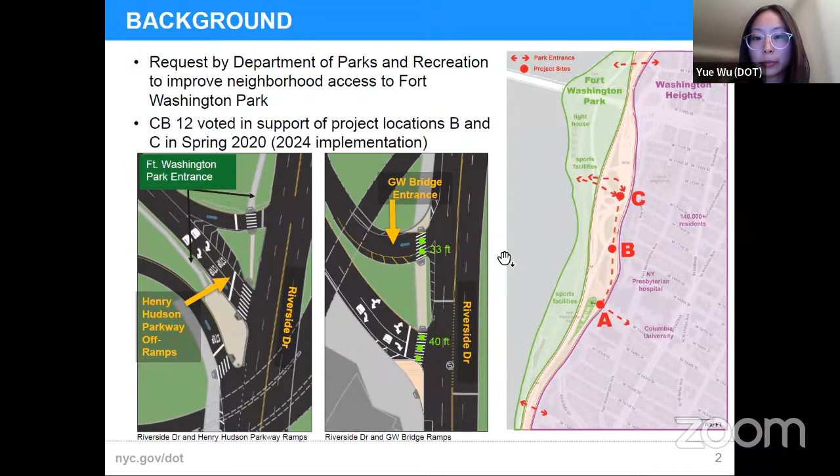Before going into details about the intersection, I'd like to quickly go over why we are working at this location. DOT got the request from the Department of Parks and Recreation to improve neighborhood access to Fort Washington Park, specifically at 165th Street and Riverside Drive - that's location A on the map to your right. We have also identified locations B and C for intervention because they are on the route to get to the park. B is at the George Washington Bridge ramps, and C is at the Henry Hudson Parkway ramps. We have already presented the proposal for locations B and C, and CB12 voted in support of our project in spring 2020. Today our focus is really location A, and we will go into that now.

I'm sure you are familiar with this intersection at 165th Street and Riverside Drive. To the west of the intersection is the entrance to the Dog Run, and at the northeast corner is New York Presbyterian Hospital, Columbia University Medical Center. Both are destinations that generate pedestrian traffic. In late 2018, the signal timing was adjusted at this intersection - the westbound to northbound right turn on 165th Street was changed to no turn on red.

Aside from connectivity and accessibility issues, safety is another important issue we need to address here. In total, there were 69 injuries at this intersection between 2016 and 2020, including 13 pedestrian injuries, one of which was severe. Six of the pedestrian injuries occurred while pedestrians were crossing with the correct signal. We have also observed pedestrians crossing without a crosswalk regularly, because there's only one crosswalk at this intersection. This really creates an unsafe condition here.

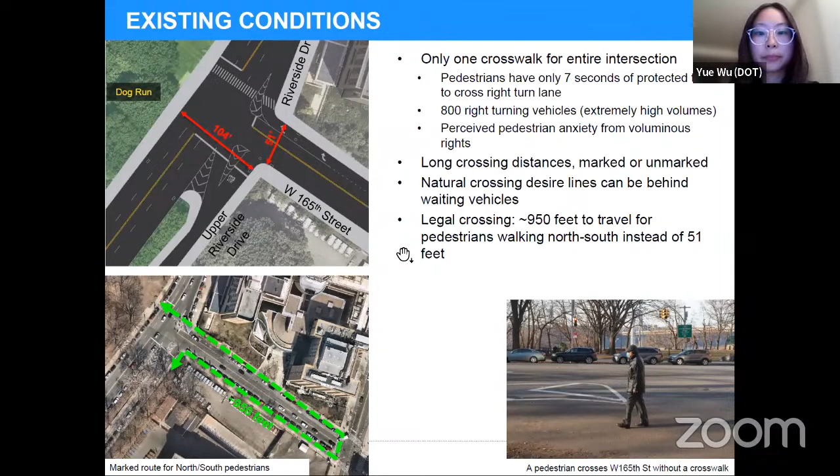Now, let's look at the proposed plan. First, I'd like us to keep in mind that the improvements we are presenting today will be implemented in-house with DOT's in-house resources. That means the tools available to us are relatively low budget compared to the big capital projects, but we are able to use these tools efficiently to address the issues we identified before.

So this is our proposed plan. I will go over the interventions one by one. Number one, we are installing 2 new crosswalks, north-south and east-west. And we are installing graveled or painted pedestrian space, represented in the cream color here, at the northeast corner and southeast corner. This pedestrian space provides more queuing space for pedestrians and also helps to shorten the crossing distance.

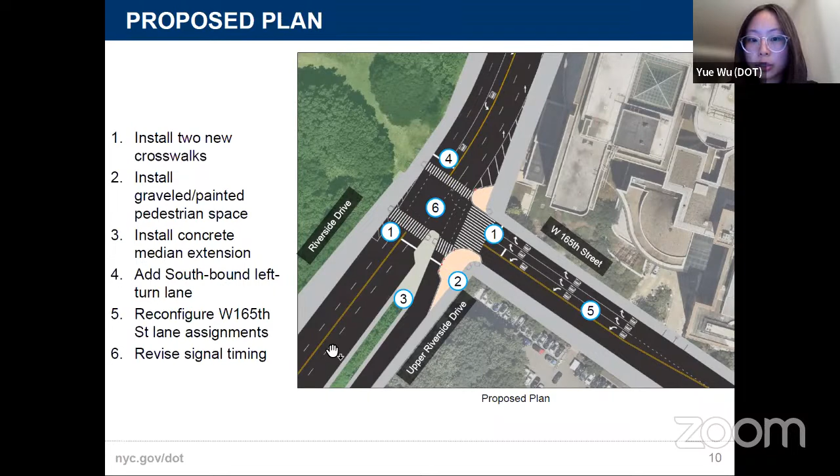Number 6, we are revising the signal timing, which I will show in detail in a later slide. With the proposed condition, we are creating safe conditions for pedestrian crossing. We have shortened the crossing distance: the north-south will be 45 feet and the east-west will be 66 feet. The stop bars are relocated to meet standard intersection design.

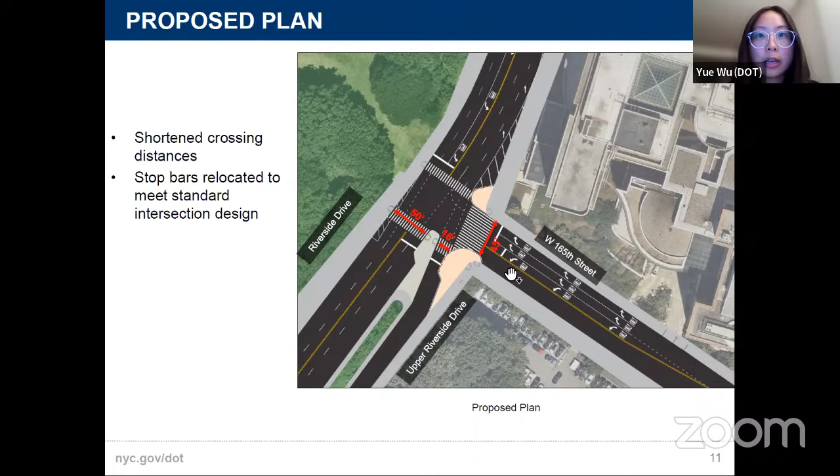The next slide is about the changes we need to make to the curbside space. In order to clarify vehicle movement, we are proposing to convert 17 short-term parking spaces on Riverside Drive to a full-time moving lane, to accommodate the left turn lane I mentioned before and reduce the delay on Riverside Drive southbound.

And we are converting 11 long-term parking spaces to a new merge lane from Upper Riverside Drive, since traffic coming from Upper Riverside Drive and Riverside Drive needs a merge lane to merge going north. Then we are converting 9 parking spaces to a second full-time right turn lane on 165th Street, again to accommodate the high volume of right turning traffic.

And we are adding 2 parking spaces next to the new concrete median extension on Riverside Drive. So overall, we are reallocating 35 parking spaces to travel lanes, with the goal to create safer and better traffic operation.

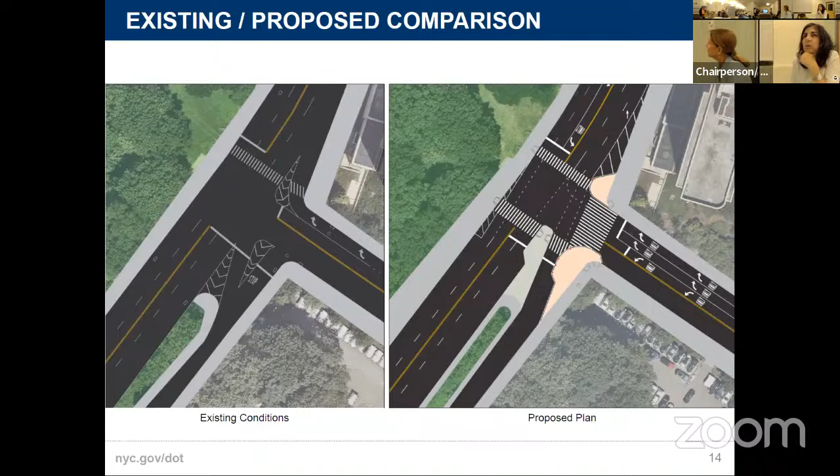I guess before I pass it to my colleagues, I'm just curious, am I just not remembering right? How were you thinking about the southbound issue? Can you tell us a little bit more about what you observe and what happens on southbound Riverside Drive?

Right, the southbound, that was part of what we discussed in the spring. The southbound left turn bay is actually a requirement from our signals unit. They said that during the morning rush hour, the high volume of left turns, which I think is around 400, is incredibly high for a left turn. They said that if we're going to work at a location, we have to bring it to current standards. So that's what they said when we presented various timing and design options to them. That was a few years ago.

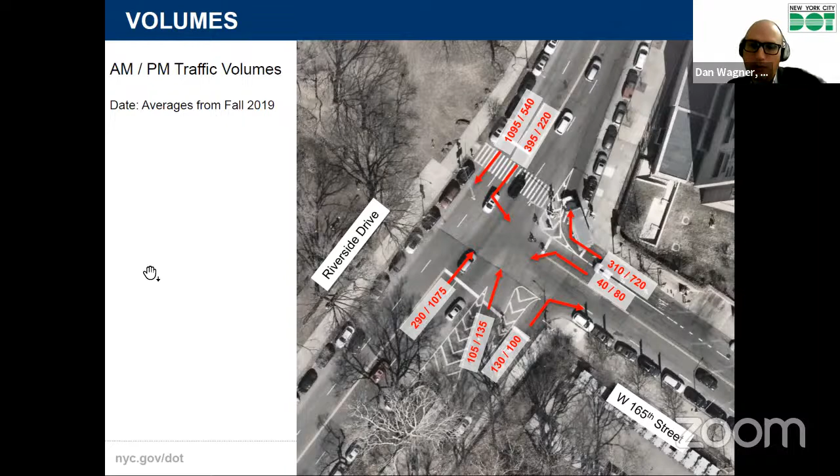The idea is essentially that if you're driving south, coming off the bridge, heading to work in the morning, and you're in the left lane but don't need to turn left, you're invariably going to get stuck because those volumes are so high. That means there's people trying to turn left there, creating a delay for the southbound traffic, almost 1,100 vehicles going south. They want to get people into their correct lanes, because that's way too many vehicles for one lane to handle. So they said you need two through lanes and a left turn bay if you're going to work here. That's what the proposal incorporates.

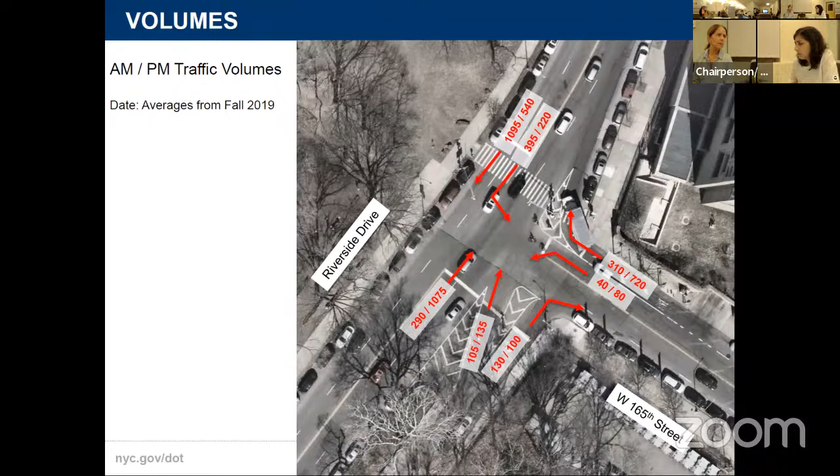Thank you for this presentation. I'm completely thrilled with every aspect of it except for one, and that's the parking. The reality of this area is it's heavily traveled by all kinds of people, and many of them, including residents at night, actually use the public parking on the street.

Now, there is a garage provided by the hospital available, but it's probably expensive. And the reality, you probably hear this all the time, but these parking spaces—because this area is so important for the health of the entire city, since it's such a major medical center—I think the number was 37 or something like that. These 37 parking spaces, if not here, then somewhere else should be made available. Now, again, I realize DOT doesn't have a magic wand and can't just make parking spaces available. And the other reality, of course, is if the traffic isn't moving in a smooth and proper manner, this has all sorts of negative ramifications.

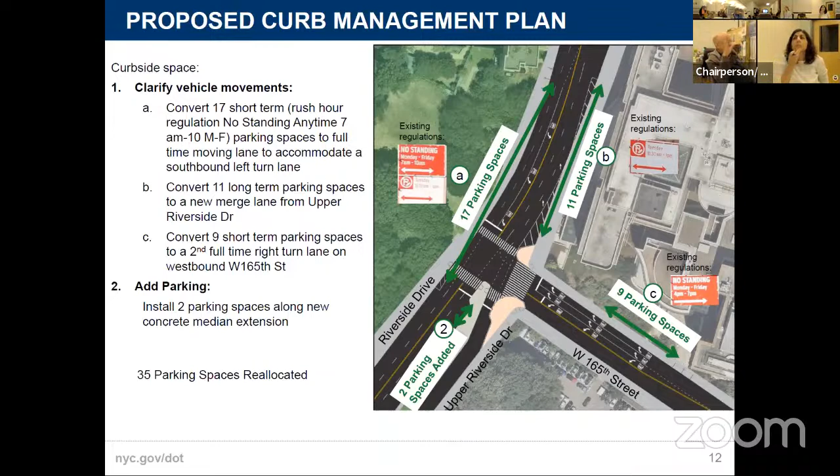Well, could you go over again the left turn aspect of this? Let me preface it by saying it's my ignorant understanding that left turns are inherently dangerous. For instance, there are no left turns in the whole state of Michigan, and traffic seems to flow there - of course it's a lot less traffic than in New York City. So for my benefit, at least, maybe some other people too, could you go over the left turn aspect of that in terms of safety?

Sure, you're talking about the southbound left turn onto 165th, yeah. It's essentially agreed that a left turn is more dangerous than a right turn. That's because when you're turning left, you have to cross the oncoming traffic, and then you also have to cross the pedestrian crosswalk. So a lot of times somebody turning left will try and find a gap in the traffic, which is somewhat dangerous on its own. And then, because they were so frustrated with the high volumes of traffic in New York City, they may have forgotten to account for the pedestrians, who are in fact more vulnerable than an oncoming car, and who are crossing slowly through the crosswalk. That's why the left turn is more dangerous than the right turn.

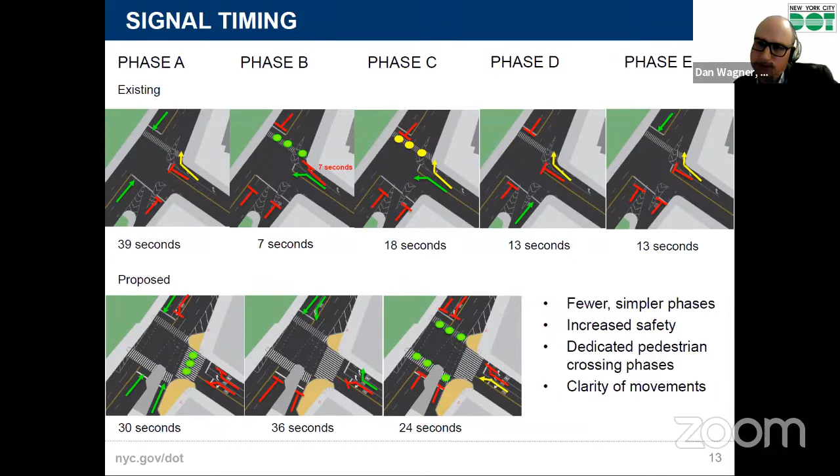But it would be a wonderful solution. You're right. Jody.

So this is my opinion, and I've been working with the residents of this area for a long time, and also Julio Batista on this issue. And I know it's a problem as far as parking, but I have to tell you that intersection is very dangerous for pedestrians. There is only one crosswalk, and we've just had a brand new sidewalk installed. And if you get to the end of that sidewalk at that intersection, there is just no way that you can cross that intersection safely.

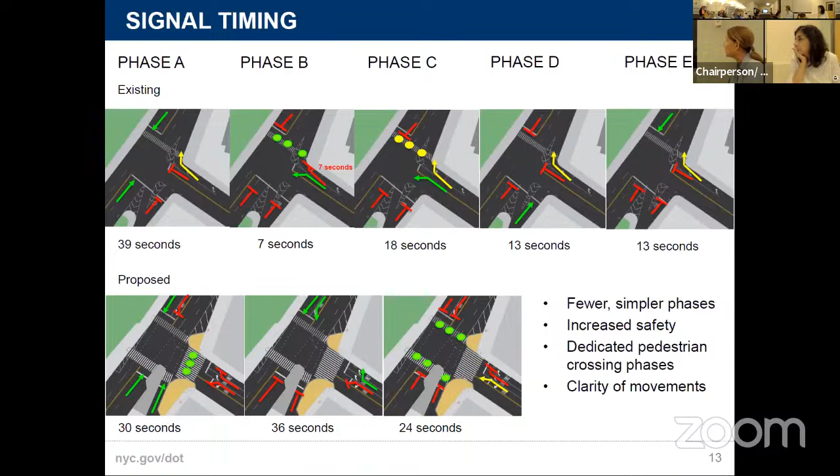And I really do believe that we need these crosswalks. And I believe that what you've set up as far as a design here is beautiful, and it's going to make it a lot safer for everybody, to include car traffic movement, and to allow pedestrians to cross. And I personally am willing to forfeit some parking spaces for that to happen, my opinion. And I think to a large degree, the residents of this area wanted to. That's what I'm hearing.

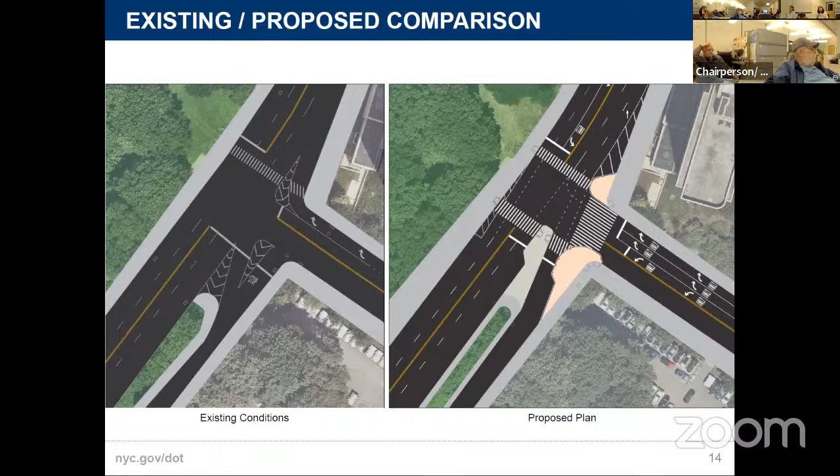People will follow the rules provided we don't get ridiculous, and so at the very least we need to alert them. I don't know exactly where you get onto that spur or whatever it is. As you all know, probably everyone in this room, we have 3 different Riverside Drives, just to make matters confusing. Especially for people new to the neighborhood, because what many people want to do is precisely make that right turn, since that's where they're going to turn to get to the hospital. So we have to facilitate that for them with additional signing. Thank you.

That's a good point, and it's hard to see how you're loading on that much volume onto the little... whatever we call it. This project will definitely come with the appropriate signage and diversion plan for that right turn. But the most immediate right turn option is actually at 161st, which will bring traffic back down to the intersection of 158th and Riverside. Frankly, if I was a driver doing that, I would probably end up on Broadway, just going north on Broadway, a couple of lefts.

Maria Luna has patiently been waiting. Maria, do you want to go ahead? Just unmute, Maria. It ain't working. Can you try again to unmute? No, you got it, there you go.

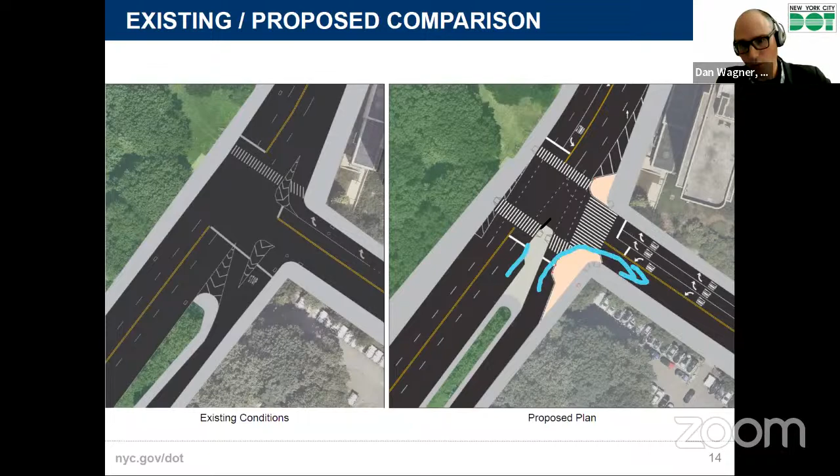Let me stop you right there. The upper Riverside Drive comes from 158th Street on the upper drive. The people who are coming from lower, from the middle, come from downtown, from around the other area - the mid Riverside Drive and the Riverside Drive West. So we cannot say that people have a choice of turning here. I'm talking about the people around here - where are they going to come? Are the people around here... you see my little arrow, the blue thing that you have here?

You have one going up north, on 165th. The second arrow here, where are they going to be turning? So the ones coming from... the diversion plan includes 161st as you're driving north, like the previous intersection.

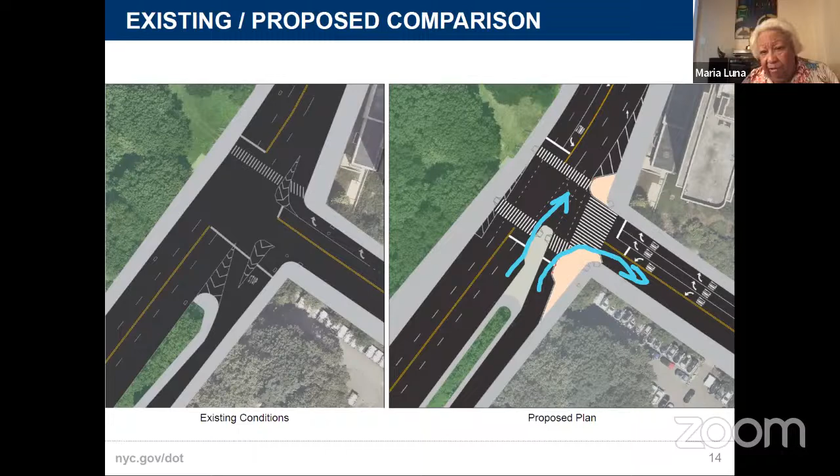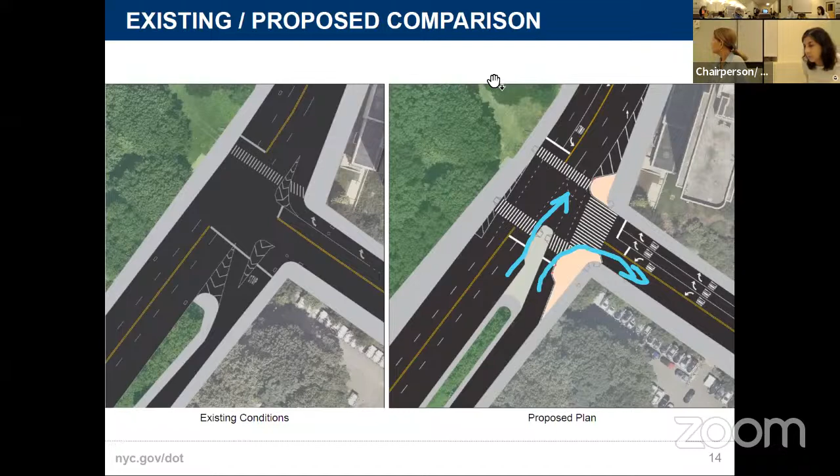We have 161st around here. Maria, sorry, I don't want the back and forth. Dan, is there anything you can show us? Because I'm having a hard time visualizing where people are entering at 161, it's a little hard to wrap our heads around. I don't have anything prepared, but I can share my screen that shows a map.

If I could say, that's 158th Street, that's where they would be able to come from. So here's what we'll do. Here's 165th, this is the intersection we're talking about, right? On Riverside Drive main line, there are no previous intersections until, going south, until the one at 161st.

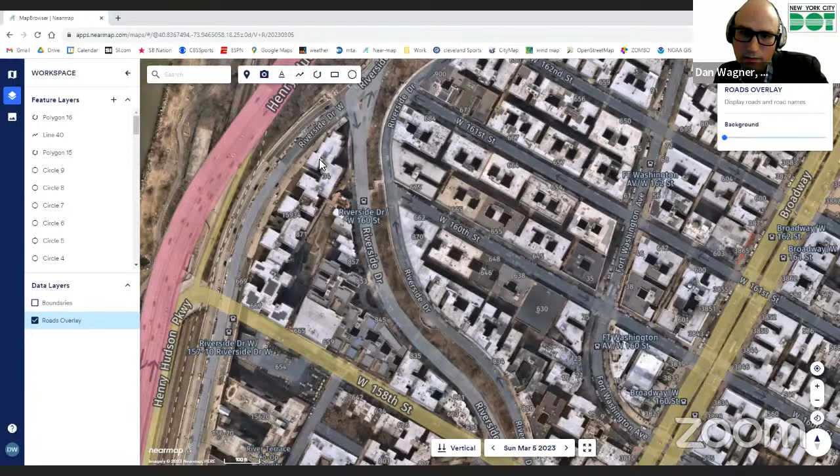There's Riverside Drive West, there's Riverside Drive, there's too many Riversides. But at this intersection, it brings you back down to 158th. But 158th is also south of here, so that's just as confusing. But at this intersection, whatever we want to call it, is the previous right turn option. So somebody in this neighborhood, if they wanted to go to the hospital, you turn right on this Riverside Drive, and it will take you to 158th Street.

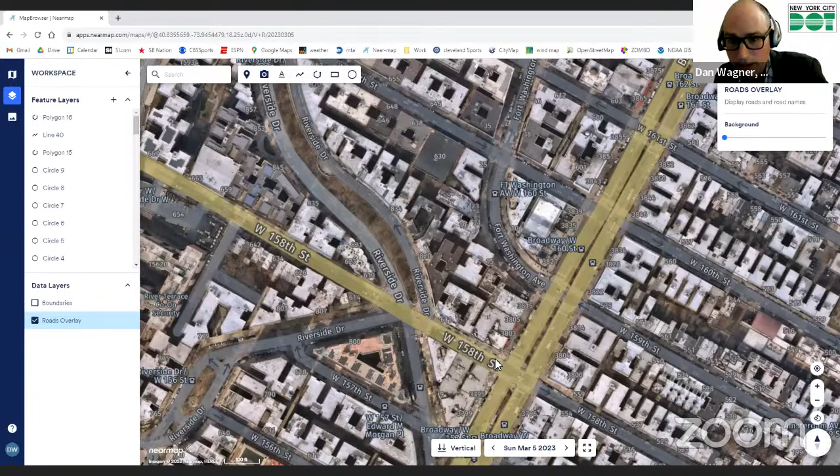And from there, you can either do a U-turn onto Upper Riverside Drive, or frankly, if it was me, I'd probably just go down 158th and turn left on Broadway. Sorry, that is a two-way street. That's where I live, right there where you have the arrow. Yes, okay, so I know that area real well.

So there is no way people can come from downtown, turn around there at 164th, go around the curve of where I live, go to 158th and go around on the Upper Drive. No good, there's no way you can do that. I totally agree with you. Somebody coming from downtown wouldn't do that either, they would turn right at 155th and come up this way.

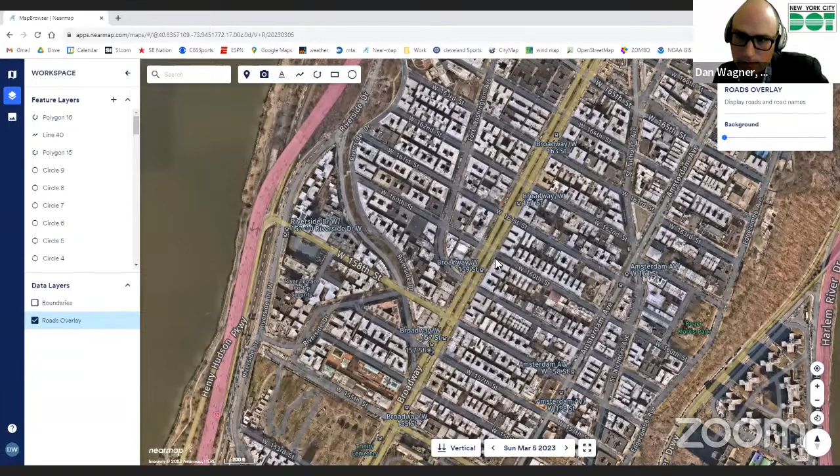Yeah, but I thought you were asking about local community. No, forget about Broadway, we're talking about Riverside, going north. Maria, I can't— I live here and I know what I'm talking about. I need protection for this area. We're not having a back and forth, I'm just pointing out that on the map, at 164th near the little playground, you continue going up to 165th Street.

That's the area that I'm concerned about. Okay, right, I got it then. So, we asked and answered: at 165th, where are we turning to go to the hospital or wherever it is? That needs to be clarified—the upper drive and the middle drive, right?

Julio? And then Bruce, and then Radia. Thank you. I sort of visualize and understand what DOT is saying, but unfortunately drivers are not going to go north, then head back south, and then go to Broadway. The last thing I want to see is people take the upper drive so they can then turn on 165th Street to make that right turn. It puts that little Upper Riverside Drive in a congested state, there's a lot of people there, and it's creating a worse situation in terms of safety.

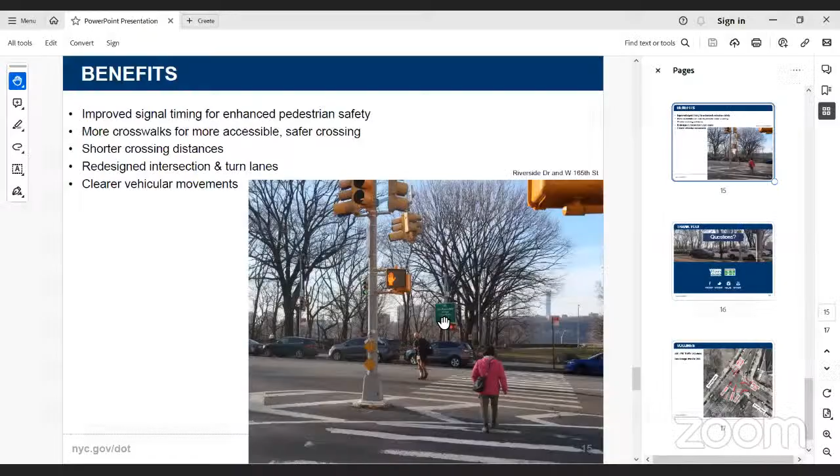Now, I would like to ask about the map—I assume there's no concrete work, this is all painting that's done. Instead of creating this long island on 165th Street, is there any possibility that instead of having that straightforward island, it could be redesigned so people who want to make that left turn on 165th Street will be able to do so before they get to the corner? You won't have a continuous island, but you'll still have a median in between so that if you need to cross the street, you still have the median in the center to cross over to the west side of 165th Street.

So I'm not sure if you understand what I mean. I understand, we explored that. Again, I didn't want to create challenges for the community, I wanted to create better pedestrian crossing here. We explored that, but it didn't work with the angles in which vehicles are required to maneuver to make that movement. So the best we could do is to ban it.

It's sort of feeling like that even more than the parking, that's not a way to go. That's like a circuitous detour. And we're not going to send people into that 5-way, 6-way Edward Morgan intersection and tell them to finagle that, because that's already a hot mess.

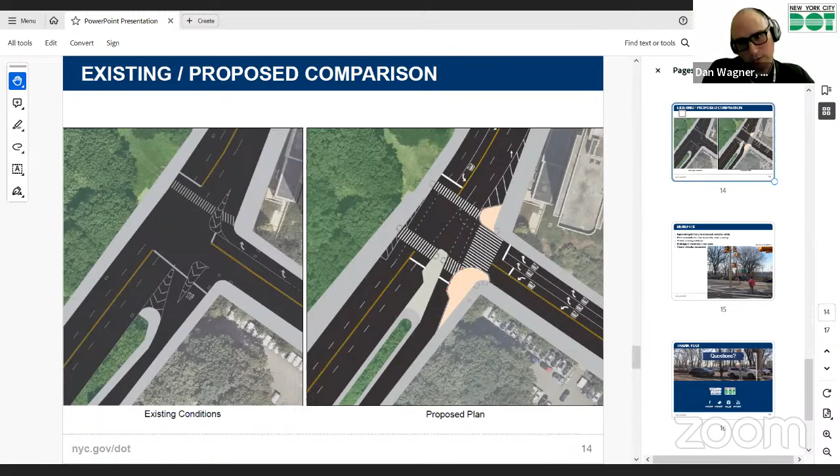Good night. Lyle, I'm gonna just ask you to go right into updating the committee, and we have people in the room as well as online that are very interested to hear about the safety improvements at Margaret Corbin Circle, which for the past, I guess, 2 years at least, has been at times a very, very tough drag racing spot.

Yeah, I'll try to do this quickly. I don't have any visual aids with me, unfortunately, so I'll talk through quickly, ideally, what the plan for the circle is. But yes, DOT does have some pedestrian and traffic safety upgrades that will be coming to the circle in the near future.

As Debbie mentioned, she and I spoke last week. I reached out to her to let her know, and she asked me to speak to the committee to say a few words about what's to come. So, just as a brief overview, we've heard from elected officials and others in the neighborhood who have asked DOT to look at installing new safety measures inside the circle to try to mitigate the speeding and other reckless driver activity that takes place there.

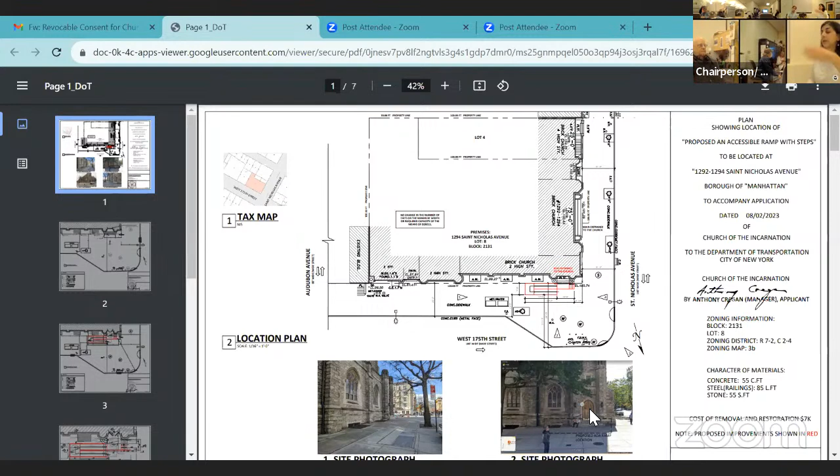Yeah, hold on, plus sign up. I know, it's just that then at a certain point, so I guess I would encourage members of the committee, if you want to go up and sort of look at the layout, and Jim, maybe if you can just point and narrate, and then I will. I'm still trying to find the ramp.

Oh, it's in red. Hi, Leo Jimenez. I'm sorry, it's in red, so this would be the ramp. Hey Debbie, hi Cody, how you doing? Doing well. There's nothing up here at the main entrance. Well, they said it's in red, so it's this thing, apparently you go.

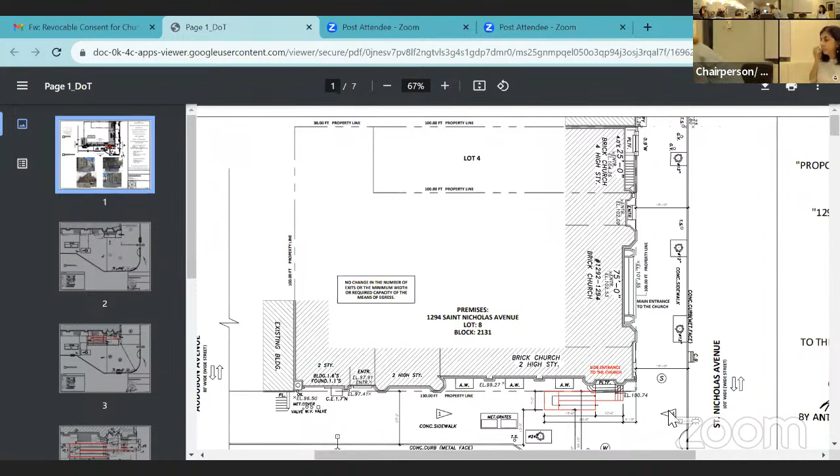So we're around going like to this side, and we're going to the side, right? So the issue is how wide the side street is. And that side is very wide also. The side street is wide. Right, the sidewalk that's on the side street, which is 175th Street, that's wide. Okay, so I mean that could be a problem, and they're not.

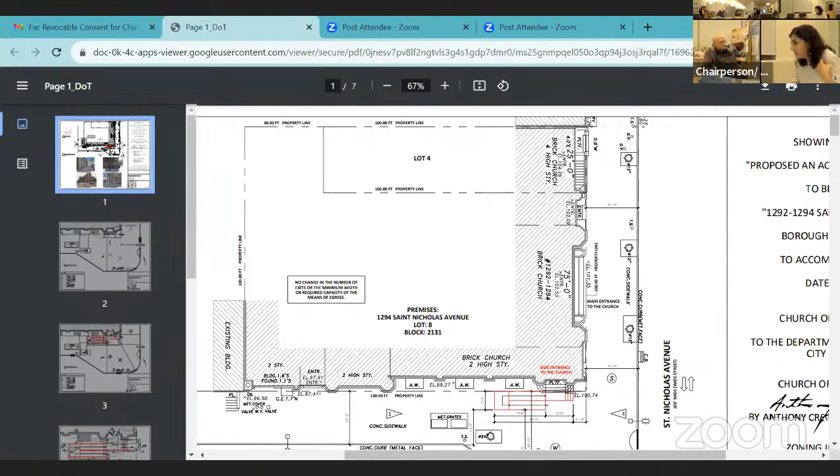Just for people that might have a hard time hearing, we're just trying to confirm that there is appropriate sidewalk remaining to move around, which I think has to meet the specifications of ADA on the sidewalk passing. So I'm not really worried about it because it's, let me see this photograph, or this possible.

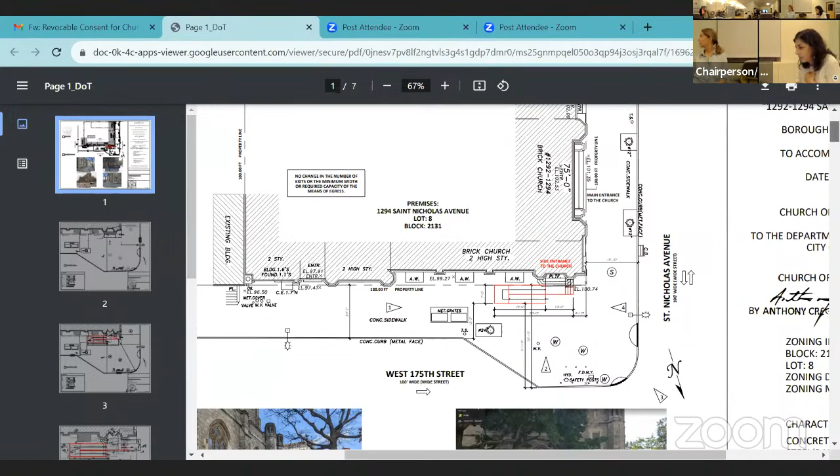Okay, so I'm just gonna start scrolling down slowly because I don't want to make it bigger. That's a nice one. Right, exactly, yeah. It's gonna be over here, stop going, it's gonna be right over here, side entrance is right up here. Yes, so one thing, between St. Nick and Audubon they have a curb extension, so there's more than enough space if we do the ADA ramp.

I think this is great for the church. I went to school there in my youth. I know many patrons that attend the church that are handicapped and need accessibility to get in there. I think that as a committee and as a community, we should be pushing for these kind of initiatives. Yeah, I'm all for it. Also, most of the pedestrian traffic, other than the people in wheelchairs, will be going in the main entrance, and there won't even be any congestion over there.

Right, so this is glorious in terms of sidewalk width. So I move that we approve this. Our second, all in favor? Anyone opposed? All right, I think Mary should abstain. Thank you.

Thank you for moving that. A member of the public is in favor also. Okay, thank you. We all got a ticket to heaven now.

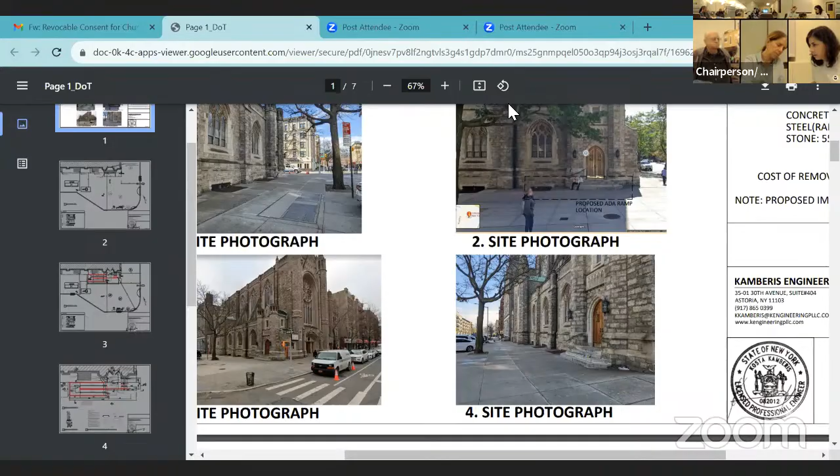We're now doing capital expenses. No, I'm sorry, this is my night of apologies to people. We had a little miscue because we did have one co-naming application that came in, and I thought it was going to be on the agenda, but there's a little complexity to it. Jasmine, I have to say we may need to move you to April, but I didn't want to lose the opportunity for you to briefly speak to the committee.

Well, let's just see. But I did want you to be able to present it because it's a lot of signatures and all of that, and I didn't want to not have an opportunity to speak about it. So this is Jasmine Coles. One sec, do we still have?